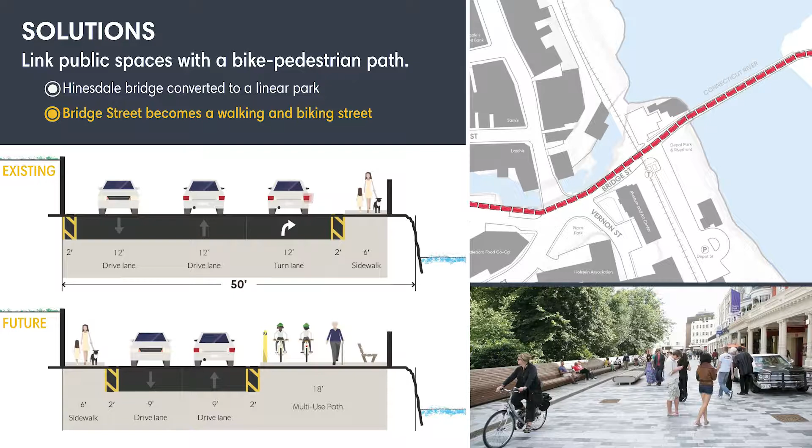And then thinking about that continues on to Bridge Street. So once the new bridge is in place, the amount of traffic on Bridge Street will be substantially diminished. Basically, the only reason to pull down Bridge Street will be to go to the Whetstone, yes? Whetstone Station. Totally just blanked on that for a second. Or to get down to the depot parking lot if you're going to get to the train station, or go to the depot area park, or park there to access other things that are on this end of town. So there's going to be hardly any cars. So this is a great opportunity to think about redesigning that space.

What you're seeing here in the cross section, the top one shows how that space is currently allocated. And you can see there's a very limited provision for pedestrians on the roadway currently. Most of it's given over to the vehicles. There's essentially, by the time you get up to the top, 3 lanes of traffic, and they're wide lanes at that. And so pedestrians are on a fairly narrow 6-foot sidewalk alongside the bridge, which isn't exactly 6 feet because the bridge structure actually invades into that 6 feet to some degree.

So if we're looking ahead, those travel lanes can be reduced down to narrow lanes. There would be room to put in potentially a small sidewalk on the museum side of the road to allow for access to the museum, and then a much wider mixed-use path type of space on the Whetstone side. It could provide an ability, you could have both the bicycling function on it and walking and some seating to look out at the brook.

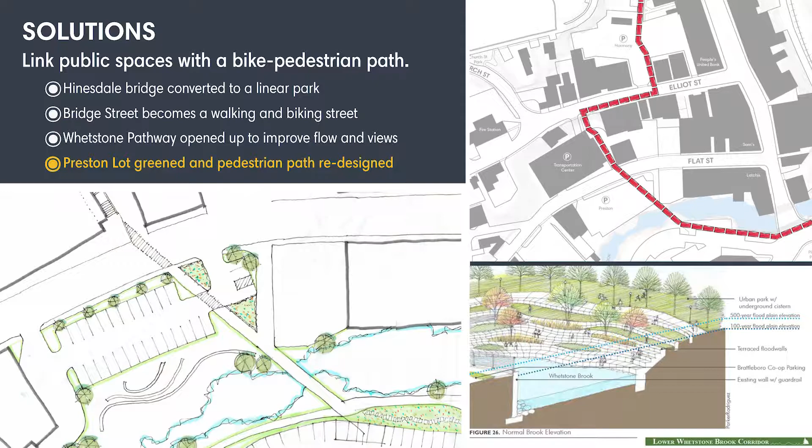So continuing along and across the Whetstone over to the Preston lot, we're looking, like Paul was saying, at that continuous line. If you go walk this now, you'll see that there's a lot of cutting right here anyway. The line that people want to go is already well marked out on the ground there. And so this takes that through to connect that important piece of your public space into the system. It keeps the alignment that was there, because that will facilitate continuing on to other portions of downtown if you're not going to the transportation center.

And then it takes part of the idea that was in the Lower Whetstone corridor plan for converting Preston to a park instead of a parking lot. It takes one of the bays of parking away and partially steps into that plan, which could allow for some flood storage potentially, depending on how it's designed, or it could provide more outdoor seating and the ability to access and enjoy the Whetstone, at least visually, if not physically. So those are our thoughts there.

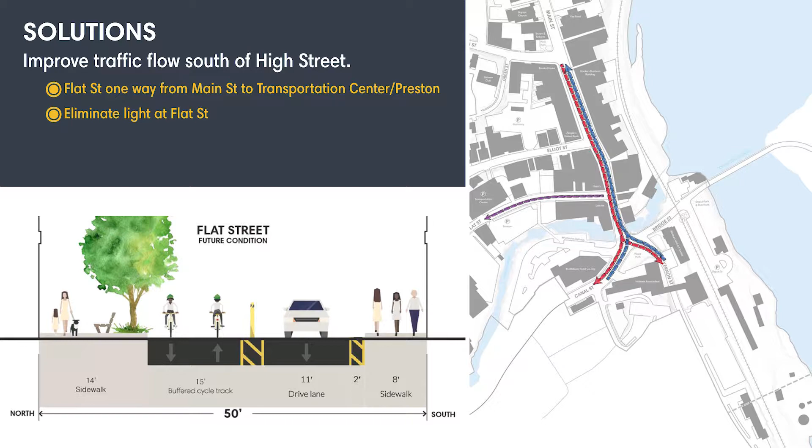So the one idea that we are playing with is trying to get traffic up the hill without stopping. Because that is really one of the pinch points and one of the points of creating a lot of noise challenges in downtown Brattleboro, is that traffic starts down at the bottom at the Malfunction Junction. It has to navigate through Flat and Elliot before reaching High Street, where the terrain finally levels off. And if you stop on the hill and you're a truck, you're going to make noise when you start again. And it's going to be challenging.

So as much as we can improve that flow to reduce the numbers of times people have to stop and the amount of traffic that has to stop. And if you're sitting there idling, vehicles are loud when they're sitting there idling. A loud motorcycle going by you is an annoyance for some fraction of a second. One that's sitting there waiting for a light is an annoyance for a very long time. So that's something to think about. How can the flow reduce some of the impacts you're having from traffic downtown?

So beginning looking at Flat Street, we've had a lot of suggestions over the last few days about making one or all or some portion of streets pedestrian or one-way, or in other ways trying to reduce the cars downtown.

We think the most viable one is to think about Flat Street and to make Flat Street one way from Main Street to the transportation center. And that would allow for, if not the entire elimination of the light, so the need for vehicles to come to a stop on Main Street on the hill, at least a significant reduction. The question of whether you'd still need a light for pedestrian crossing is something we're still thinking about there.

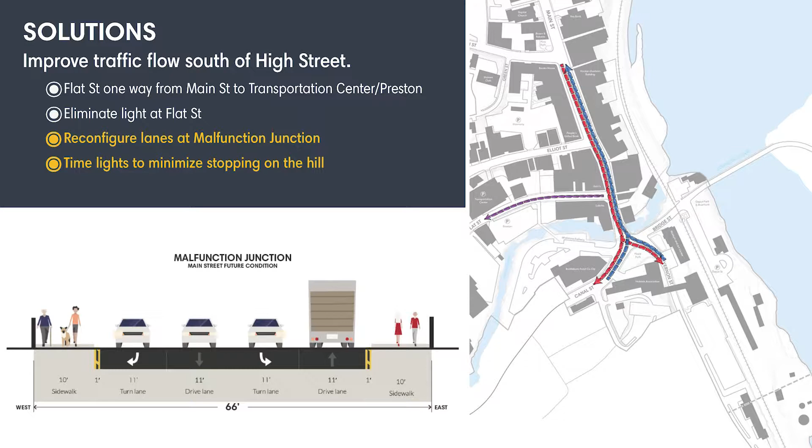So with that in mind, it's possible to compress that amount of space in the intersection, so that you would still have the 3 lanes, but you could really end up with 11-foot lanes for turning, and in fact you could end up with lanes to turn right into the co-op, to continue straight onto Canal, or to turn left and go most likely on Vernon, but potentially also for the traffic that would want to go down Bridge Street.

So you could have more constant movement, particularly the traffic moving into the co-op. That right turn could move a lot more traffic through, so that piece keeps flowing. And then you really just need the one lane coming north. So it allows the widening out of the sidewalks along the bridge to some degree.

Question about that? So this is like we're standing in Malfunction Junction looking up Main Street at now 3 lanes of traffic coming down toward us, but only 1 lane going up Main Street. Right. But feeding into that now 1 lane going up Main Street is all the traffic that's going to come from the new bridge up Vernon Street, plus the traffic that used to come up Vernon Street, plus the traffic coming from Canal and the traffic coming out of the co-op.

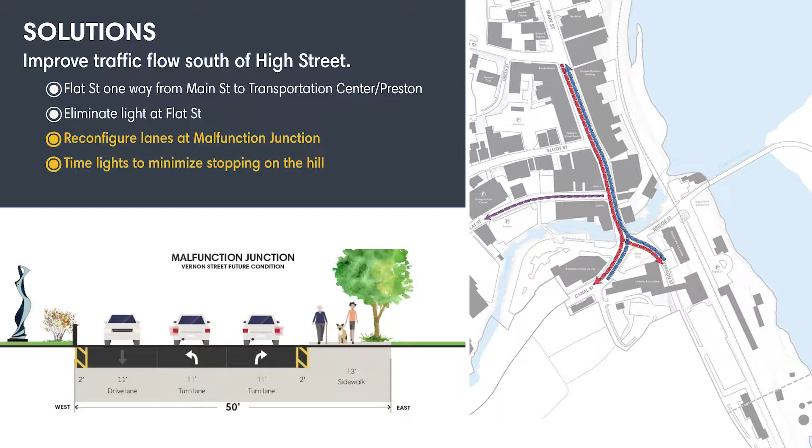And if you eliminate that and just reduce the width of the lanes a bit to 11-foot travel lanes, which are now the standard, used more frequently than the 12-foot lanes. 12-foot travel lanes are an older VTrans standard at this point. You then get a much wider sidewalk in front of the museum. And what this allows is getting past the wall. There's a lot of things in Brattleboro that involve trying to get around a big change in elevation.

So if the sidewalk extends further out, you can actually get in front of and down and around the retaining wall and start your way down Bridge Street on the museum side, so that people, say, who want to come to this museum and come in the front door, who park back in Depot Street, can walk up a sidewalk a long ways alongside the building and end up in the front. So that's one option to think about there.

There could be some slight shifting and re-angling of the roadway at that point, which could facilitate more space as well. But even if the road stays exactly where it is, if the space is reallocated, I think it may be enough to get in front of the wall. In addition to that, when we take a look at how the traffic's going to change, and not the need to turn right onto Bridge Street as much, the right turn lane as shown in this cross section may not be necessary as much. I should explain, Paul.

This is confusing. I probably should not have used the right turn. That is actually not right onto Bridge. That's just onto Main. Gotcha. And that one goes back. All right. So you've got Main and Canal essentially, but you could make the Bridge Street turn obviously from that point too. But the primary traffic, presumably, would be going to Main Street from there. Yeah. Okay.

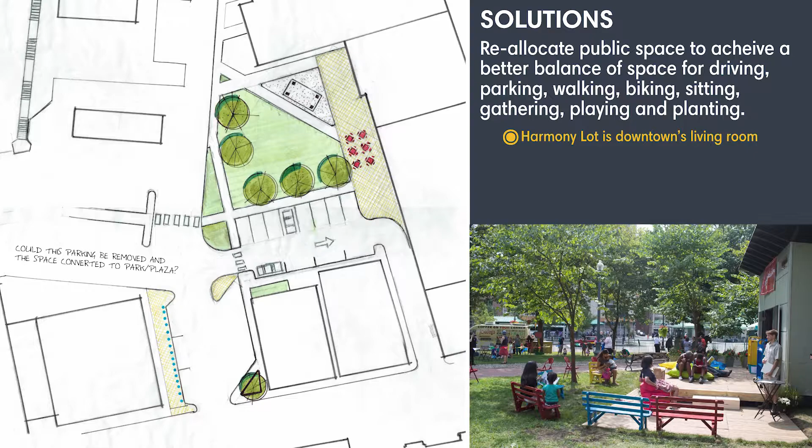So I think, Paul, we're up to the Harmony parking lots. Right. This is another item we looked at. So one thing we recognized on our walk and talk tours on, was it Friday? I'm trying to remember. It's all so blurred. Thursday, Friday, Saturday.

So on Friday we had people mention that this Harmony lot space is a place where a lot of people had a lot of memories since childhood, activities, and meeting people, and it's a very active pedestrian space, even though it's got a lot of parking back there. And then we looked at the analysis, which Brandy brought up before, of current use at peak periods of the Harmony lot and the adjacent garage. The garage, I think, at peak is 57%, the Harmony lot's at 82%.

So the need for parking there is still important, but the fact that this pleasant area has so much pedestrianism and activity asks the question, can we enhance some more pedestrian area, multi-use space back here? So this concept is a result of seeing what could be done to still maintain the public lot and the private lot, access to the ATM, and some parking, but taking a little piece of it based on those percentages for additional pedestrian use space. And then adding maybe some special paving and hardscape area, so there's still vehicular and maintenance access that may need to happen to businesses and buildings there.

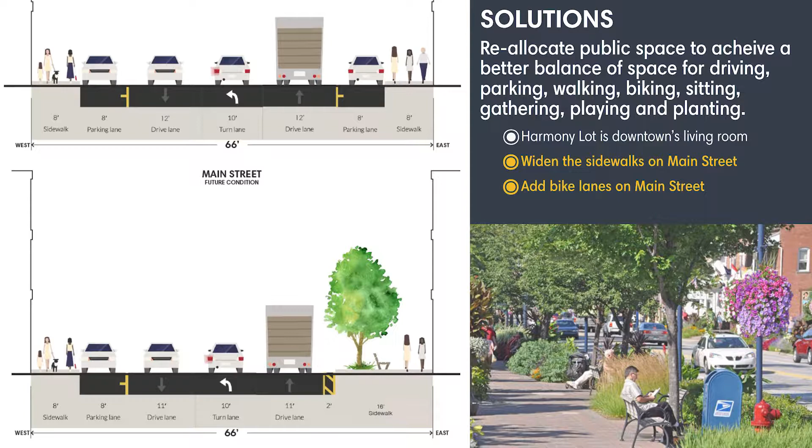If you said, well, there aren't bike lanes now, and I don't plan to bike on Main Street anytime soon, so I would rather see sidewalks, you could do the same thing, taking away one side's parking, and reallocate that and give it to sidewalk. It probably would make more sense to give one side more room so that you actually have enough space to do some meaningful public amenities. So some real room for larger plantings or seating and more space generally.

So this one is set up with 16 on, did I say 16? I think it's 16 on one side and leaving the 8 on the other. May I? Did you have a question?

I would really love to see some accommodation for bicyclists because it is really difficult, and I do bike on Main Street. Sometimes it's just the easiest way to get somewhere, but it's fraught with danger with the opening of people's car doors, and they don't see you, and trucks sometimes have things on the back of them that can stick out and catch you. So I would love to see the bicyclists on the sidewalk, like they do in Europe, which makes it even safer. Not that they would be going with pedestrians, but they would have their lane on the sidewalk.

So there are some transportation reasons why that isn't as commonly done in the United States, but it is a policy decision. So that is one thing to think about. I will say that these 5-foot bike lanes are sort of the minimum you would want. You would really prefer that they be wider, and they are going to have issues on the side with the parked cars and people opening their doors into the bike lane space. So it fits, but it's a tight fit, and it's not the best amenity ever.

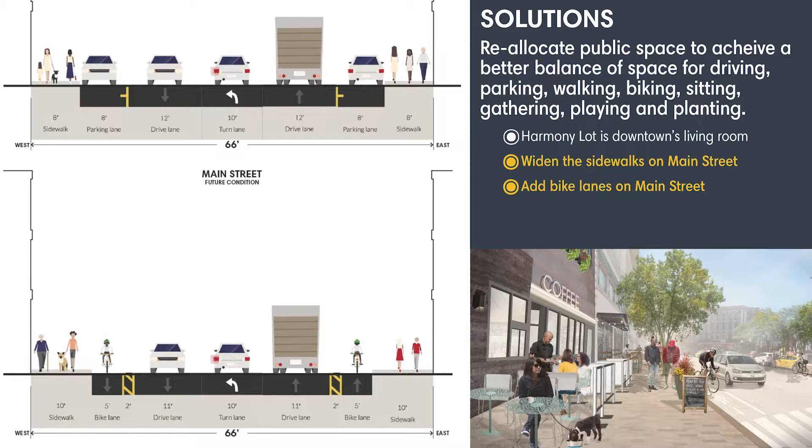But in chunks and in segments, there's the possibility that you could go the full way and take away the parking altogether and then have additional space. So this shows that with bike lanes, which are really more usable buffered bikeways, lanes that would create a safer and more pleasant biking environment, plus wider sidewalks on each side.

And once again, you'd have that choice about whether you wanted to have more sidewalks on one side or the other, and sort of have one that's more of a get-where-you-need-to-go kind of walking street, and one that's got more space for seating and other amenities. So those are, just if you're thinking about the space that's there and what you can do with it.

We did this whole exercise during the Charrette where we actually let people have these little pieces and cut them out, and I had to cut them out. I did not make people cut them out. I spent a lot of time helping Amy cutting out these little pieces. Each one of these was a different... Little pieces and letting people build their own streets. And so we got lots of different ideas about how you could put streets together.

I taught Sue's daughter an important fact about parking lanes needing to not be right abutting the building, because otherwise you couldn't open your car doors. So it was a good exercise to sort of see, like, this is how much space we have, what could we do with it? So that's something that other folks can explore too, think about. And you had a comment or question in the back?

Is there any measurement increase for the space around the trees? Because I know they've been very condensed and like bonsai almost from how little space they've been given to grow. Yes, your trees that are living on Main Street are a real testament to the desire to live because everything is working against them. They don't have enough width and they don't have good access to water, and their soil is completely compacted. And they're also getting all that car exhaust thrown at them all the time. And then the stuff the plow truck throws. So it's not good if you're a tree on Main Street.

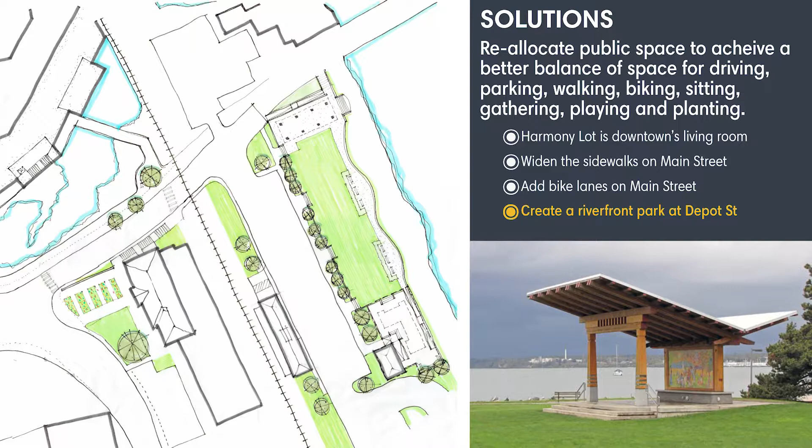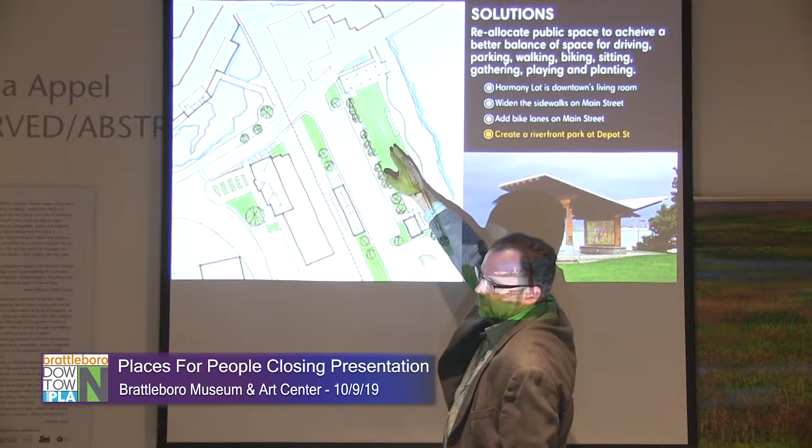Okay. So moving along here to some other potential solutions that we looked at. Do you want to take this one, Paul? Sure. So just some ideas as the new bikeway comes into place along Bridge Street. This is your current open green space down near the river. From what we understand, this is a brownfield. So being sensitive to how this gets developed is important because you can't really cut too much into the slope. There's a cap there already right now. So no digging.

Yeah, no digging. But it can still be developed. And so right now it mounds up and mounds back down. So one of the sketch ideas that came out of the Charrette that Chris Kennedy was working on was actually providing a small serpentine retaining wall along the edge there, and then you just fill a little bit to level this off a little bit more. It'll actually increase the grade a little bit and provide an enhanced view.

And what we'd probably do is get in here too and do some selective pruning. It's important to still keep a lot of vegetation along the river because for erosion, those root systems are very important. But what was noticed, especially on the walk and talks, was that you have a lot of invasives there. You have tree of heaven, and you have Norway maples, and you've got some climbing vines of different varieties. There's quite a bit of invasives that should and need to come out.

So when your areas do get developed, there's probably a survey that's going to happen. What we would recommend is that they also survey good trees that are existing that are natives, like gray birch that are in there as well, but also identify where the invasives are located, and then those can come out. So that'll provide opportunities for enhanced views.

You can level this off more and keep this as a larger multi-use area that can be used for various kinds of events and just recreation and frisbee and whatnot. The idea to have an open air structure there can just demarcate the end of this and maybe be able to be used for larger events. So in a way, the Harmony Lot was like a smaller event venue space. This is a larger event venue space. If you have a larger band, perhaps, or outdoor movies, where everyone can sit on more of a level lawn area and watch those activities.

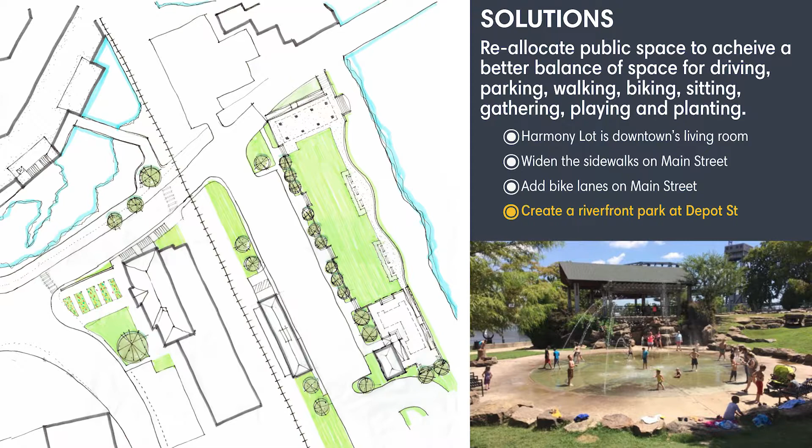But just being a big open space is good too, because this is one place in Brattleboro where you have these incredible views of the river as well. So that's something to think about. So that's the thinking with that piece of it there. And maybe thinking of some play space as well. That's one of the things that we have noticed is lacking amongst the public spaces in Brattleboro, is any sort of place for playing and outdoor recreation.

There was a question in the back. Are there plans for there to be more public restrooms with plumbing in these areas? So that is certainly a good question and something that the master plan will be looking at. Obviously, park facilities typically come with public facilities like water fountains and toilets, particularly if they're going to be major public facilities. That's clearly something that there is a significant lack of in downtown Brattleboro, public amenities like toilets. It has improved with the porta potties, but there's a way to go.

Brandy, is this the wall you were talking about? Yeah, so this is the museum here. So there's this retaining wall. So if the sidewalk can be moved out, you can actually get around that and get down there.

So just some basic things we were looking at is thinking about which way the parking is oriented down at Depot. Right now the parking is oriented so that you park towards the building and the drive lane is behind. This switches that around, so you park facing the river and the drive lane is behind. So if this becomes a place where children are playing, they're not playing right next to the moving vehicles. The parked vehicles are a bit of a buffer. So things like that to think about.

So that's where we're going to stop talking so much for tonight and open it up to hopefully more questions and thoughts and such.

Did you decide not to deal with the Harris lot? Oh, no, it's just that we haven't really dealt with the north part of downtown Brattleboro at all yet. During our work session, we really focused on the area around the bridge and the intersection, because that is sort of the immediate change piece where there is something happening. So we did focus there, but definitely with the idea of bringing that pathway up through the parking lots and getting up to the north. The Harris parking lot was something that during our walking tour we stopped and looked at. For those of you who haven't gone to view it recently, it has a lovely view of the river and backs up to the recreation center. So once again, it's on that list of possibilities of, does it all need to be parking? Is there some possibility of getting some other public benefits out of this space?

The walking lane, you're not calling it that, the red line, what are you calling it? I haven't got a good name, so if you could help me market it, that'd be great. Okay. Who is it designed for? It would be a mixed-use path, so both for bikes and pedestrians. It would be primarily probably for residents, but certainly if you start to think about, as Paul mentioned, the fact that people do travel to go on bike paths. And I know in the community there's larger conversations around interconnecting existing trail systems in the region. And certainly if this becomes a leg of that, it could be a bigger tourism draw and more visitors could use it.